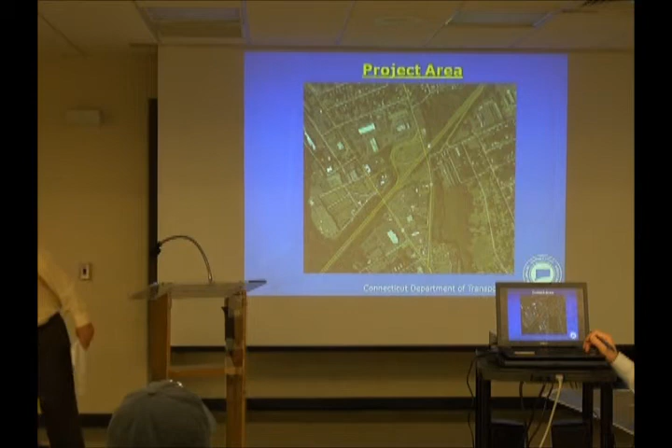Let me describe the area. This is an aerial view, a Google view of the project area. Route 63, Route 69 -- I know it's not as clear, it looked much better when it was not as large. There's Lucy Street, the Parkway, and the southbound and northbound directions.

This is Pondley Avenue. So this is basically the project area. In the south we will be doing some minor improvements down at the intersection of 63 and 69. I'm sorry, I know you can't see through me, so I'll move to the side, but I still want you to hear me -- if you can't, just let me know and I'll speak louder. So the southerly limit of the project is at the intersection of 63 and 69, and the northerly end of the project will be at Lucy Street.

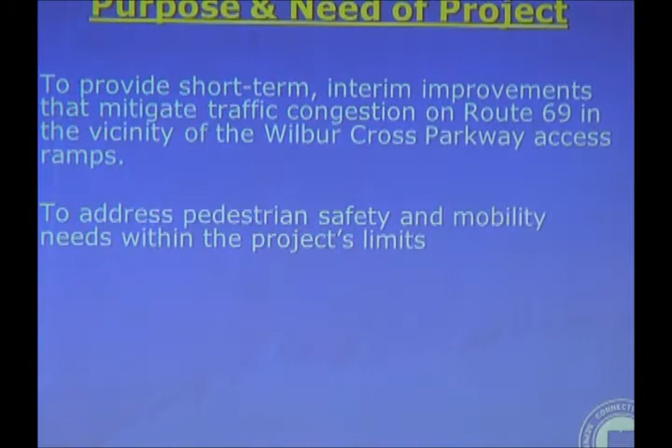The purpose of our project is basically to provide short-term capacity improvements, and also to provide pedestrian improvements both in safety, accessibility, and mobility.

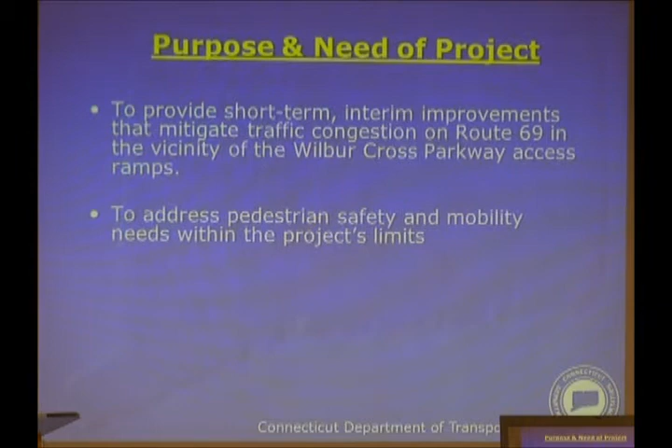So, as Peter mentioned, we're in the project development unit, and what we do is develop projects. We try to gain consensus through various stakeholder meetings like tonight, and eventually we will initiate that project.

The other milestones in the design process: our design would start once we initiate a project. It's going to go down to our state design unit, and they'll be doing the design. As Peter mentioned, once you get to the preliminary design phase, that phase identifies where the impacts are, where the new curb lines will be, what the impacts of that new curb line are, and it gives the public more to look at as far as really what the design looks like.

What we're showing you tonight is a conceptual design. It meets our standards, and these are basically the framework of what the design will look like. This green arrow shows us basically where we are in that process.

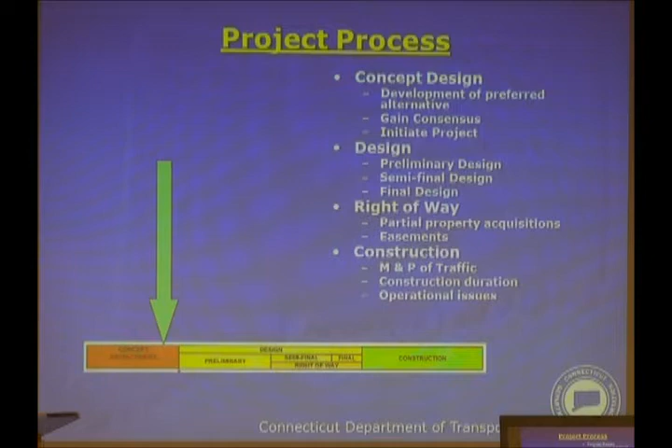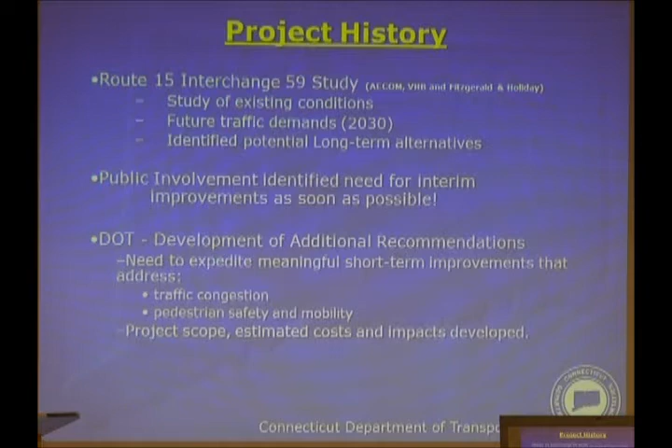This project has a history. It's been an ongoing study, I believe four years or so in duration. This area has been studied, and there's been some long-term alternatives that have been discussed and developed. There was a public informational meeting held in May of this year, where the results were made public. One of the reactions to that public outreach was the fact that there wasn't a lot of short-term improvements included.

So we basically made an effort to look at this again, to identify any short-term improvements that were potentially there, and we were successful in doing it. Again, we're trying to ease traffic congestion. We know the need for longer-term, more meaningful projects is warranted here.

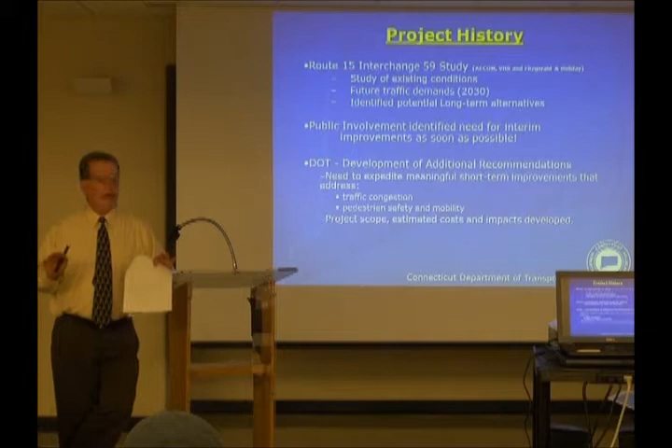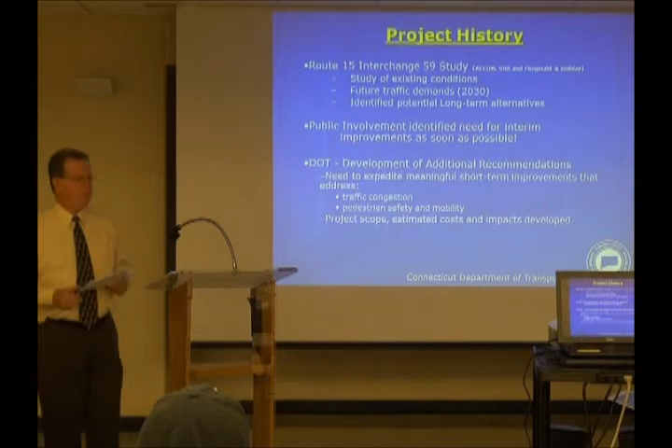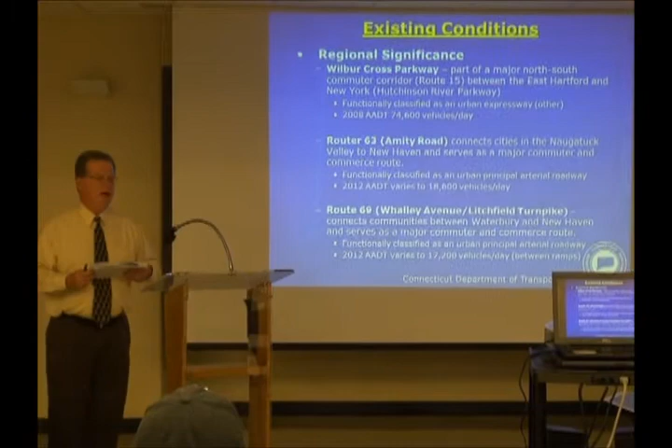There are safety concerns that the department's very concerned about. There's congestion concerns from a larger perspective that we're looking at, and there are other initiatives in the area. There's also a study of Heroes Tunnel going on, which I'm sure you've been made aware of -- that was covered in the May meeting. Just to go over some of these, there's a major convergence of roadways at the Wilbur Cross Parkway, a very busy roadway.

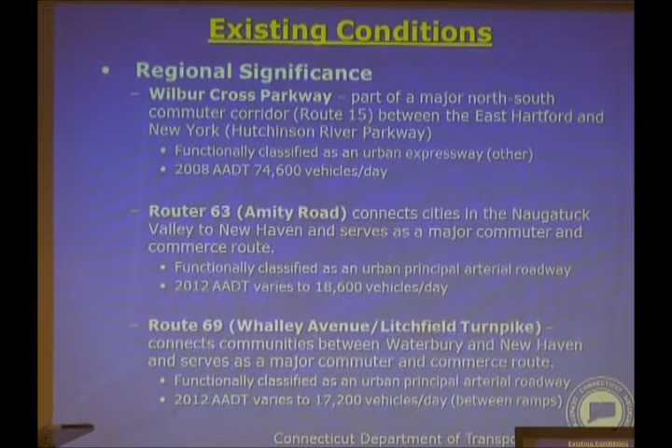It's a north-south route, but it really goes east-west also. It's a major connection from New York to New Haven and beyond. Route 63 basically connects, although it goes way up in the corner of Connecticut, it really serves the cities in the Naugatuck Valley, providing a direct connection into New Haven and also access to the Parkway. Route 69 terminates in Burlington, but it serves the Waterbury to New Haven corridor, and also access to the Parkway. So, very busy roadways.

Between Route 63 and 69, there's actually more volume on Route 63 because it connects those nearby cities of the Naugatuck Valley to New Haven, whereas on 69 you're going through Bethany and Prospect into Waterbury. It's just a little different corridor.

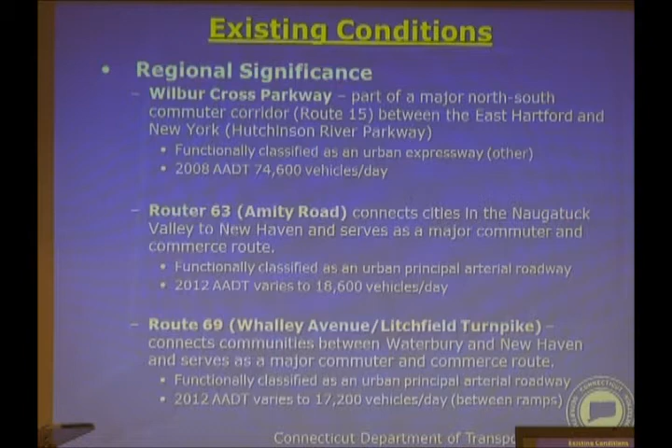But there are some other roadways in the area. You have Lucy Street, a state roadway connecting Route 63 and Route 69. It's a very busy roadway, partly because of the access points to the Wilbur Cross Parkway, basically used as a connection to get over to those access points. Pond Lily Avenue is a municipally owned roadway, but it serves as part of the entrance ramp for northbound Route 15.

We have some speed data here. Basically, both corridors have a speed limit of 35, and the average speed isn't much higher than that. This is information that we tend to need as engineers, so a lot of times we plug them in - not so much that the public's interested, though it could be.

As I mentioned, the connections to the Wilbur Cross Parkway - 3 of the 4 movements are accessed exclusively off Route 69. There's a lot of traffic being transferred from Route 63 onto 69 to access those ramps. The only shared access point is the southbound entrance ramp, which is also access to Route 63.

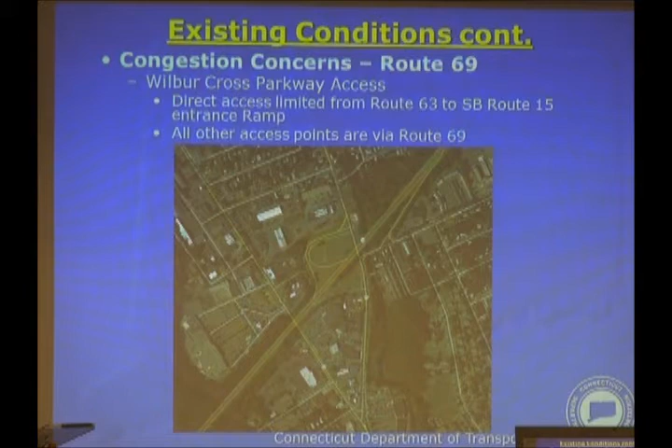It takes approximately 25% of that signal time, which equates to just about 30 seconds. Overall, it's 25%. The cycle length is 115 seconds. Now, I know that could be mumbo jumbo for some people who aren't into that, but the bottom line is that phase is causing some additional delays.

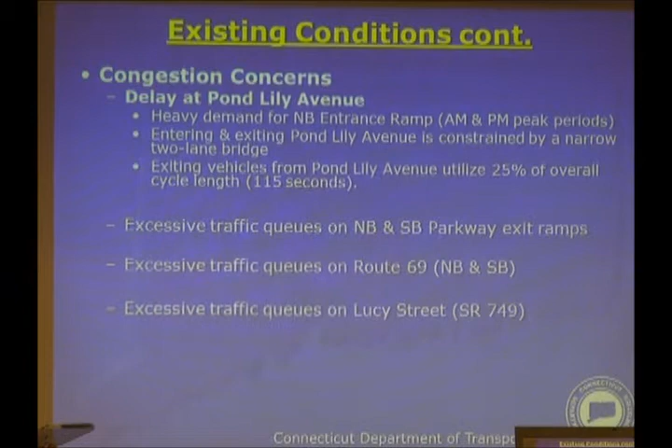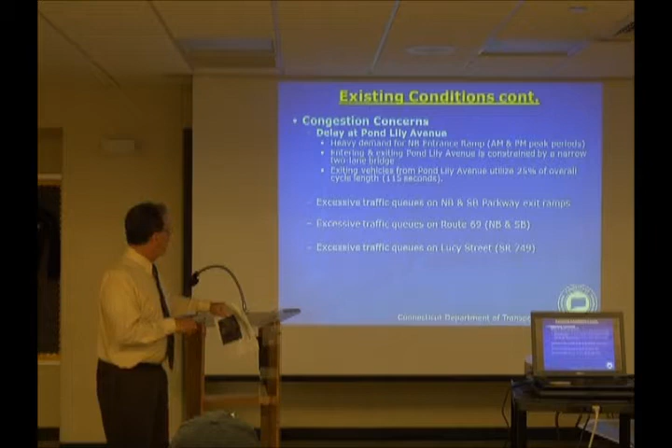Actually, we have such heavy demand for southbound left turns and northbound right turns that the excess time needed is very significant. So because of that compressed time period, out of 115 seconds, it leaves about 85 seconds for the other movements. And because the demand is so great, that's not sufficient, and you start getting congestion and backups because of that.

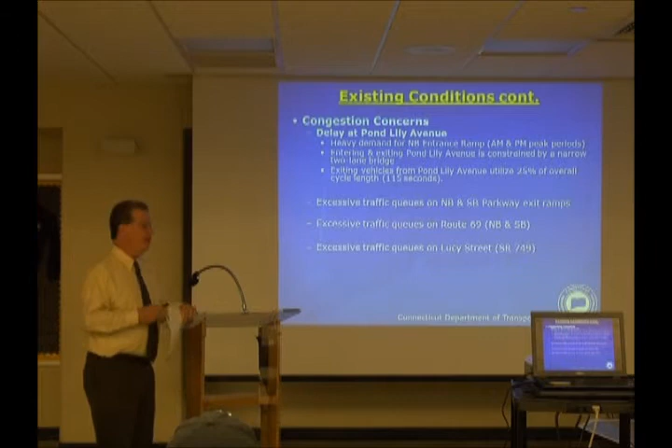In the southbound direction, as those who drive it will attest, it will back up to Lucy Street. Many people think there's a problem with Lucy Street. Although it could be made better if it was wider, the key or underlying problem is here at Pond Lily Avenue.

Along with queues, we also have some things not necessarily related to this - the parkway exit ramps. The northbound is not signalized. They have to vie for gaps in existing traffic. So that's a congestion point.

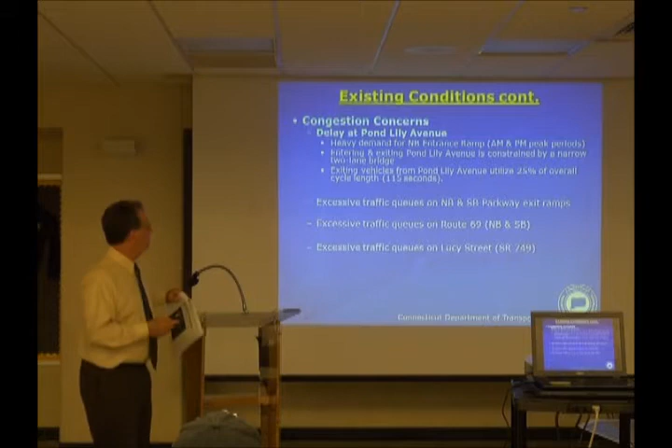And also, southbound exiting vehicles have a heavy demand for left turns exiting the ramp. There's only one lane that accommodates it, and that's really not sufficient. So we have congestion in this area, and that's why we're here tonight, to try to address that.

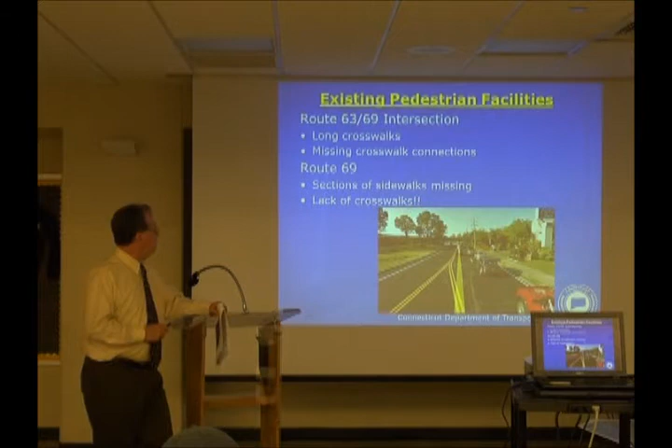So, the other thing, just to complete an existing condition overview, is the pedestrian facilities out here. At the intersection of Route 63 and 69, there are several crosswalks. They're very, very long, and it's missing one of the major connections because of the openness of Whalley Avenue going north, where it's wide open at the split for 63 and 69. There's no pedestrian crossing there.

As you continue north on Route 69, the next crosswalk is at Lucy Street. There are no crosswalks on Route 69. The sidewalks on the east side of the road extend for maybe a third of the way and then disappear. You have basically a worn path, with some short sections as you approach Pond Lily Avenue and in front of some businesses on the east side of Route 69, where the city has some motels. This shows a depiction of that worn path, as I was mentioning.

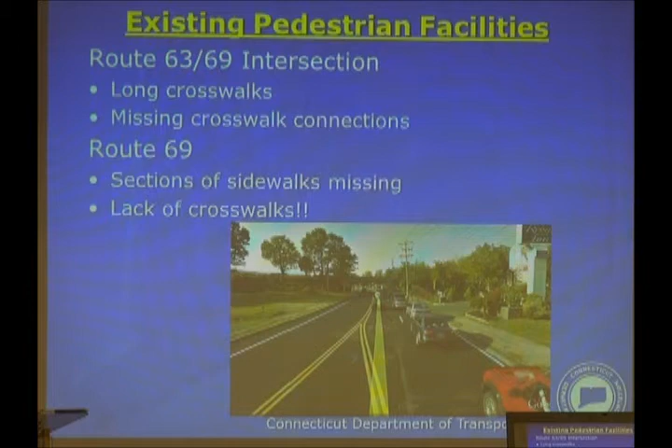It's very difficult for pedestrians to cross the street. Once you're on one side, you're basically locked in because there are no crosswalks. It's a very busy road. So we want to acknowledge the fact that pedestrian facilities out here are really insufficient.

So at this point we're going to go forward and describe some of the improvements we're looking at. Starting from the most southerly point, the intersection of Route 63 and 69, we made some modest improvements. It's a very busy intersection, as everyone is aware, and a major diverge point for northbound traffic going onto either Route 63 or Route 69.

This image has a darkened area here, just to make the proposed improvements a little more visible. Underneath that darkened section, you can see the existing crosswalk. It's in a location where it's extremely long. By moving the stop bars back, it allows us to shorten those crossing distances significantly.

We also added at this split a raised island splitting Route 63 and Route 69, and added a crosswalk in this area as a safe harbor for pedestrians. The other modification we're proposing is a bump out at this side street. It's a one-way roadway with parking on the right, so the bump out on the right side protects that parking.

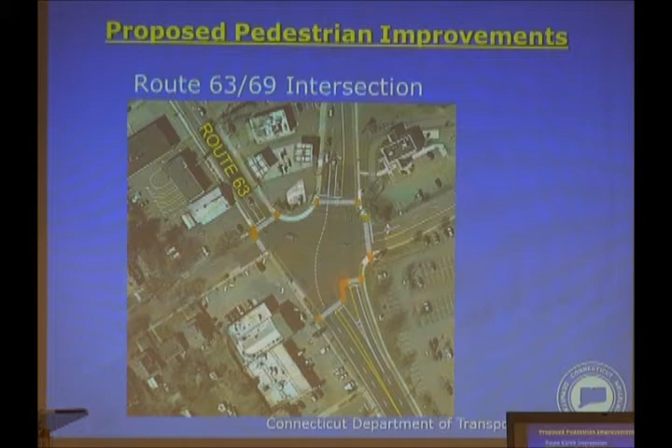The next location we're going to discuss - I've blown up particular areas so we can discuss them. After we complete the PowerPoint, we're going to put up the image as a PDF showing the whole project plan, and if anyone has questions about any area, we can zoom right in and talk about it. But for this presentation, I've just identified certain key spots where we're making modifications.

At this location, this is the northbound exit ramp onto Route 69. Today it's unsignalized, with a one-lane approach - you can see the shoulder stripes here. What we'd be doing is widening, not a lot, but enough to provide a two-lane approach. This allows us to manage traffic better, with lefts in one lane and rights in the other. Since this will be signalized, it also gives us the opportunity to provide a crosswalk.

This is the section of sidewalk on the east side of Route 69 that's missing. There'll be new sidewalks from just north of the intersection with Route 63 and 69 up through this area, on the east side of the roadway. There's also a short section in front of the gas station at that corner that would be extended.

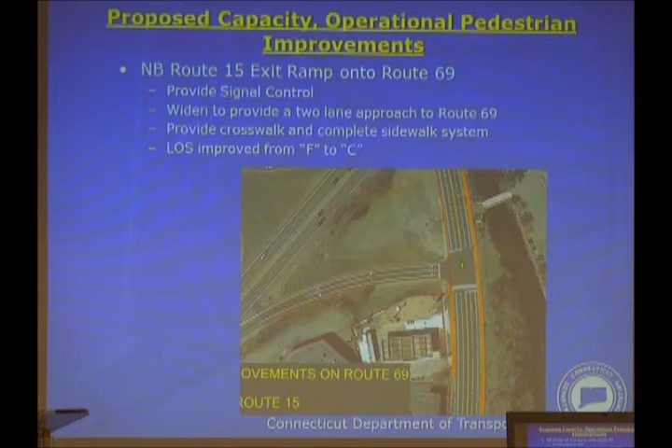This is the next location, north from Route 63 and Route 69. This is the intersection that had our focus - this bidirectional roadway has some characteristics that cause concerns or congestion.

That roadway goes over a brook. It's a two-lane, rather narrow bridge, so it doesn't allow for a two-lane approach into the intersection from the west, nor can we make a double left turn, because there are only two lanes on that bridge, one in each direction.

When we looked at the volumes, one of the things we do as designers is go out and get turning counts at each location, so we know how many vehicles are making maneuvers at any particular spot in the network. At this particular location, I think it has something to do with congestion at the Route 63 and 69 intersections - people on Pond Lily Avenue find other ways to go south. As a consequence, we have very few lefts being made at this location.

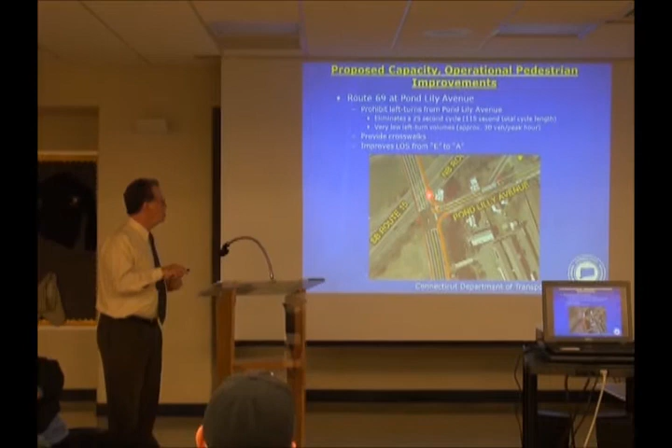There is a heavy right turn, and that heavy right turn would still be able to be made - it would be an exclusive right. We would put up a raised island configured in such a way that would prohibit lefts out. Now what this allows us to do is...

We're going to change the phasing at this signal. So as these lefts are being made, these right outs are being made - call it an overlap. Basically, there is no time being attributed for exiting vehicles, which allows us to use that extra time on Route 69, both south and northbound. So we're getting significant congestion relief, an improvement in traffic operations, by eliminating that phase.

The other thing we're doing here is providing crosswalks. Again, this is exclusive on the east side of the roadway, not on the west side. The west side is very tight, and that's the area of the ramps. We really don't want people crossing an expressway ramp if we can avoid that, so we have pedestrians on the east side of the road.

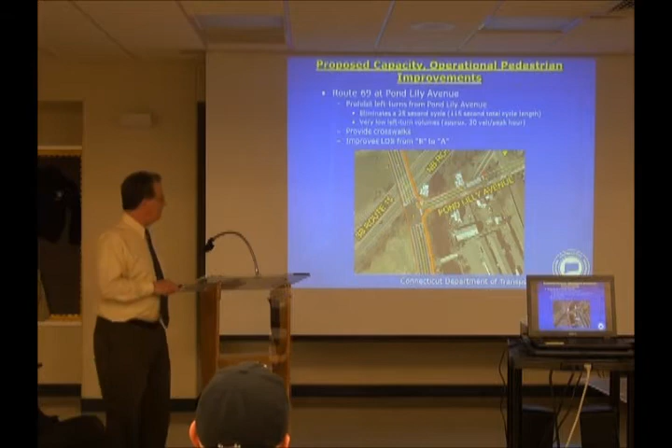In conjunction with that, one of the other things that came to our attention was: today, westbound vehicles on Pond Lily Avenue have the right of way over eastbound vehicles heading for the expressway. What we've done is propose a stop sign for those westbound vehicles, and also a 'do not block the box' restriction at that location, so that area always stays free.

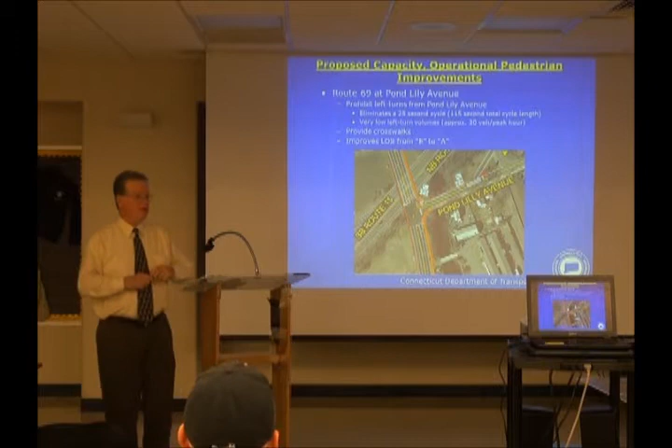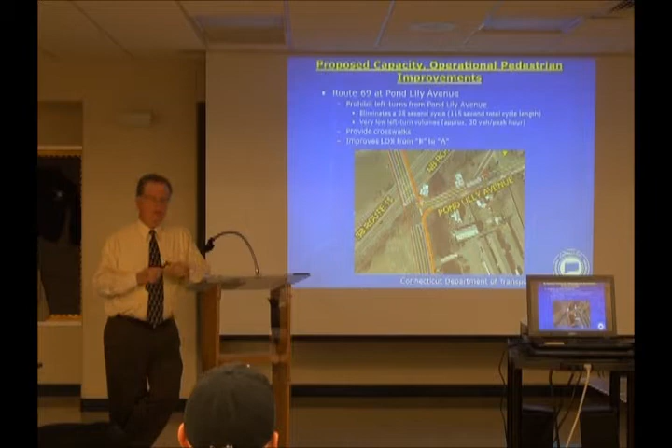Now, the other thing we're doing here, which isn't really part of this image but you'll be able to see when we put up the large-scale plan, is at the intersection of Valley Street. Today it's a two-way stop sign - going up the hill is uncontrolled. We're proposing to make it an all-way stop at that location.

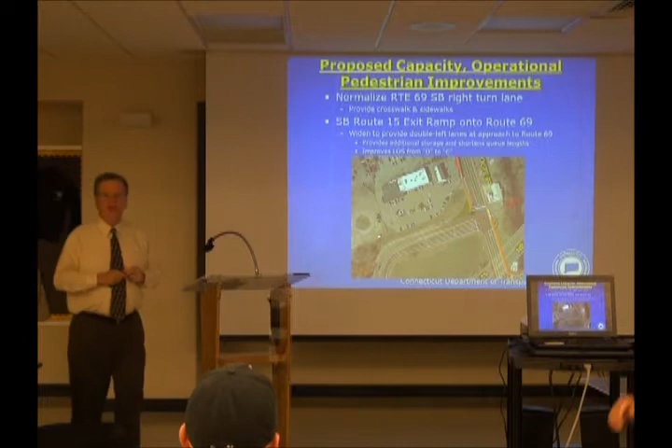Okay, continuing north - this is the southbound exit ramp. What we're proposing here for changes in travel lane use is starting a two-lane split for that exit ramp, just as you come out of the horizontal curve, for exclusive left and exclusive right operations. As you continue, it would be widened to allow for a double left.

So the idea is that if we have two lanes, we get people closer to the signal, it'll take less time to process those left-turning vehicles through the signal, and we're going to have more time for operations on Route 69.

The other thing we're doing, again, is continuing that sidewalk on the easterly side of the road. This is a little bit different for those familiar with the area. Today there is a right turning roadway - it's outside of the signal, and there is a yield at the end of that ramp, that little turning roadway. So you yield to left turning vehicles entering onto the ramp.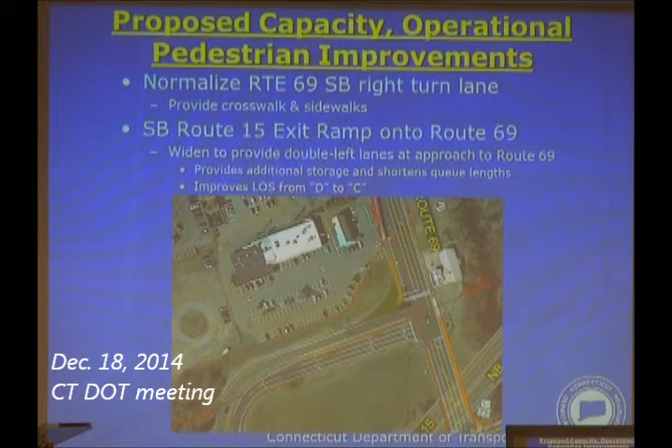Actually, looking at the volumes, they really didn't warrant an exclusive lane, because access from Route 63 is present - that's the one movement we can access through 63. The right turning volumes really weren't terrible; they're really exclusively from Route 69. So unlike all the other movements where you combine the volumes for both Route 63 and Route 69, this is the one movement that's actually rather light comparatively.

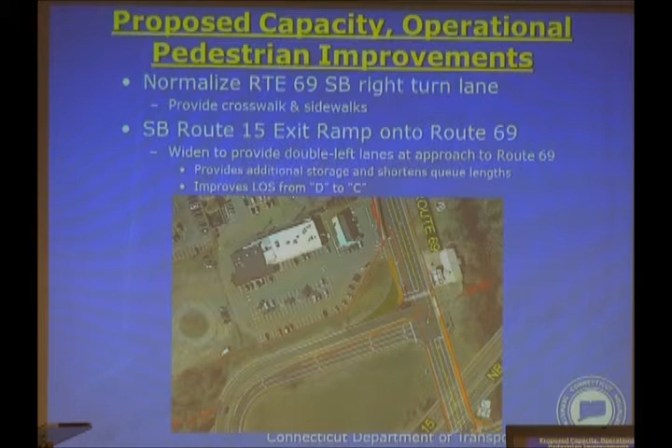So what we're doing, again for pedestrian safety and pedestrian access - this was brought to our attention and we incorporated it - is a crosswalk here. There is no crosswalk there today, so we're proposing a crosswalk and bringing that right turn lane into the signal. Likely that would be right turn on red - it'd be allowed. Seeing that we're still preliminary, I'll just say likely it will be done that way.

But that kind of encapsulates what's going on at this location. Again, double lefts, and also bringing that right turn lane into the intersection and providing pedestrian access. There would be a new sidewalk that would connect to the existing sidewalk, which is just north of the driveway.

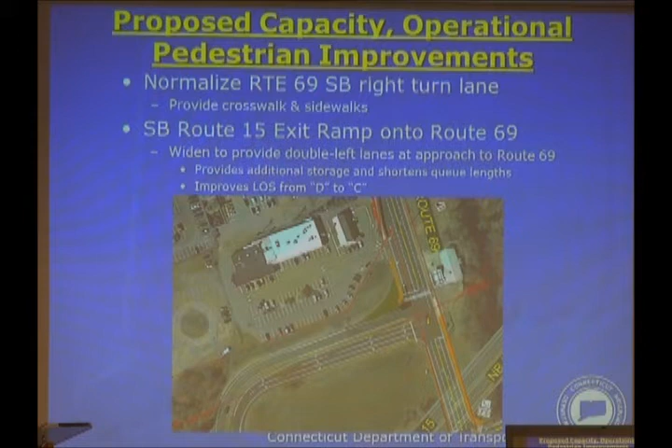And lastly, as far as our improvements, short-term improvements go, we're extending that sidewalk up to Lucy Street. We're also providing a widening. This darkened area shows a widening, or it's supposed to show a widening. Just looks like a black spot. But anyway, it does allow for an additional through lane up to that point.

Now, again, we talked about these improvements being short-term. If we had extended that lane further north, we would have some major property impacts. That's not something we wanted, to avoid that, because of the nature of these improvements, trying to get them out as quick as we can. So our widening in this area is limited to just south of Merritt Avenue. So again, that additional widening will allow for additional storage and will overall help the network.

Now, as I'm looking at this, I realize I never did mention what these improvements do to capacity. Typically we talk about capacity as level of service. Level of service is a measurement of delay. And based on delay, they'll assign a certain value, A through F. A being very good, and F means that you're there far too long, roughly.

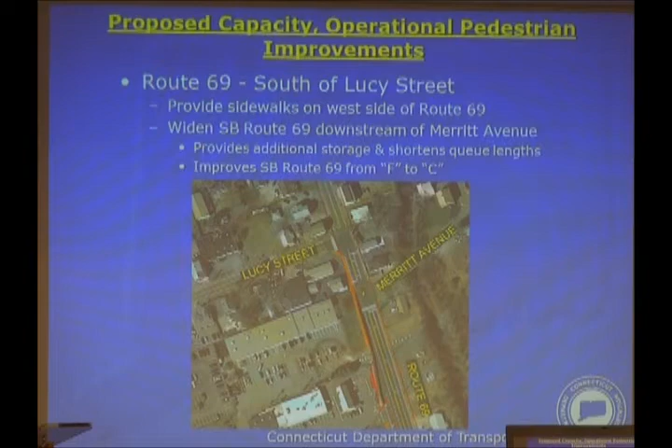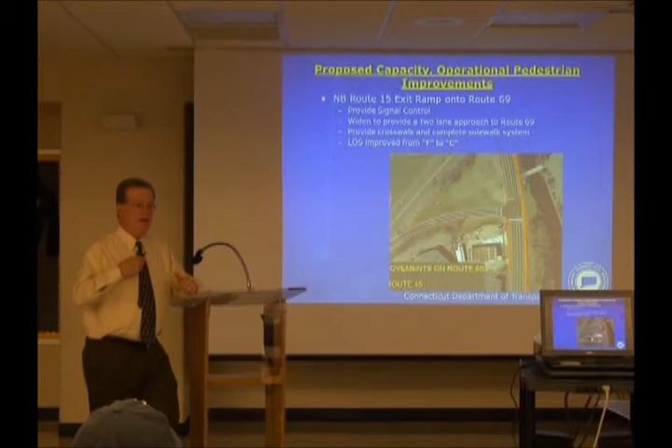And basically from our, could you go back a couple? Sure. From, yeah, we'll start at the northbound off-ramp. Basically, this ramp queues up because there's no gaps. Because of the delay on this ramp, the overall intersection capacity is an F. So the delays are that you are waiting an inordinate amount of time on that ramp waiting to exit.

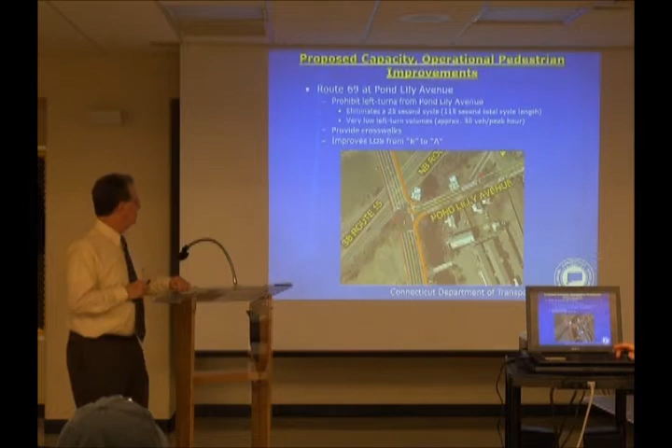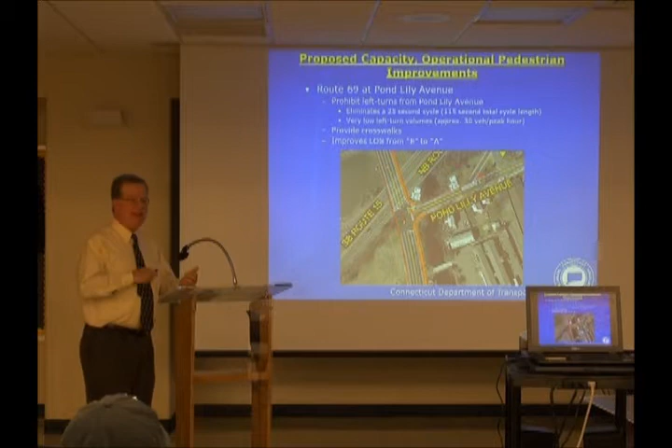As we go further north and we look at capacity, yes, this is actually a level of service B today. By eliminating that phase, very few people are stopping. The left turns have to yield to the right, to the through movements, but that's a two-phase signal. It's very, very efficient. We're getting an excellent level of service out of here. That's a significant capacity improvement.

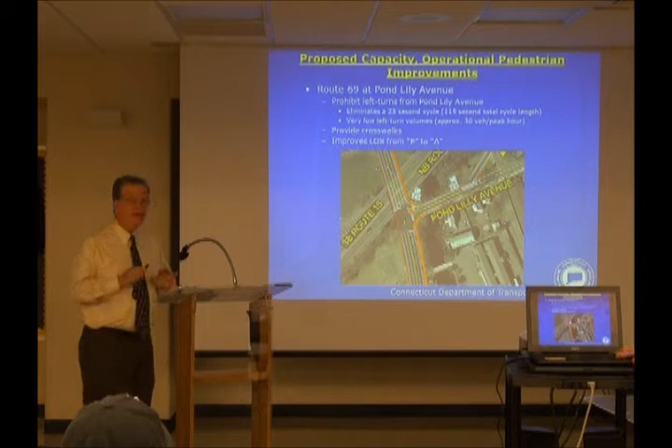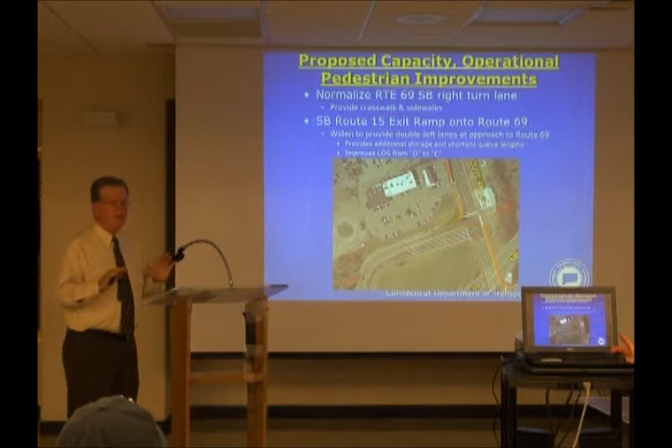At the off-ramp, we've gone from... it's still a C, which is acceptable. It's like a 40-second delay or something like that, that range. Much improved from what it is today.

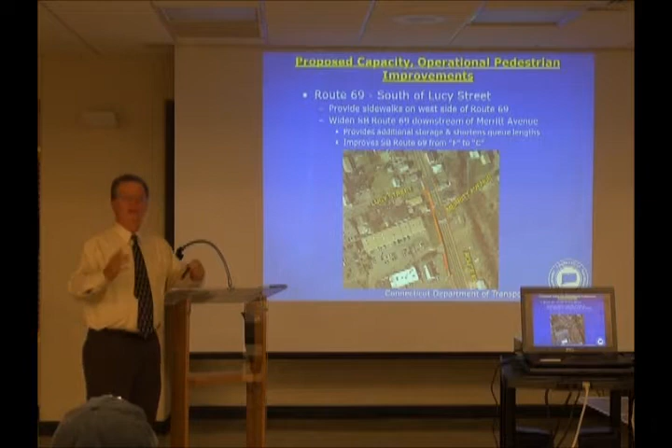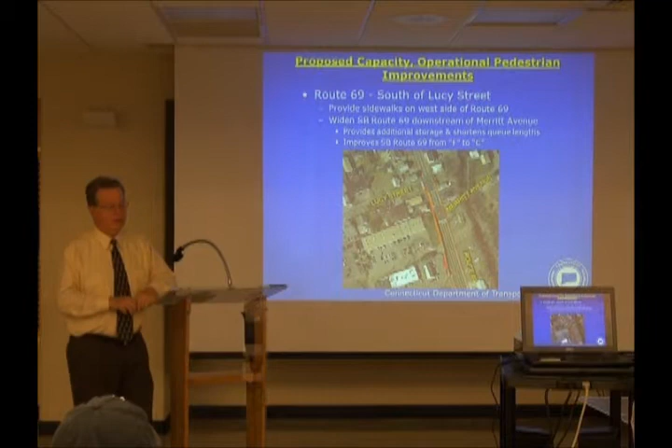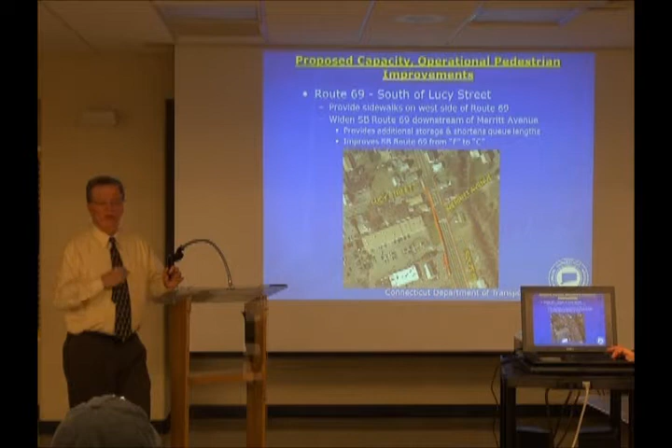And as you go further north, up at Merritt and Lucy, Lucy Street is still going to queue up. Again, access points, we didn't change any of the access points. Vehicles from Route 63, 3 of those 4 access points are going to have to travel down Lucy Street to get on Route 69 to access the Parkway. So there'll still be queues there, but the through movement will be much less delay, and overall, even though it's still considered an F today, it's... well what did it say, C? Well, the overall intersection improvement may be a C, but I know that people sitting in queues on Lucy Street may not be real happy because they're still going to be sitting there in queues, but it won't be for as long. And the overall operations of the intersection will still improve.

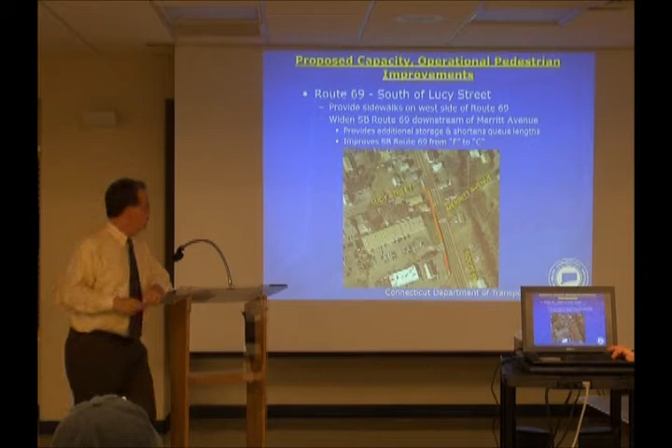So again, I think the nature of what we're doing, you could say we didn't make a lot of changes here. We haven't added a lot of new pavement, but we are getting some significant capacity improvements.

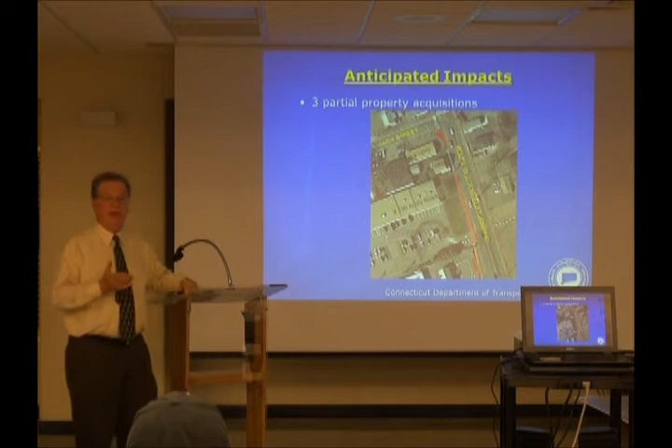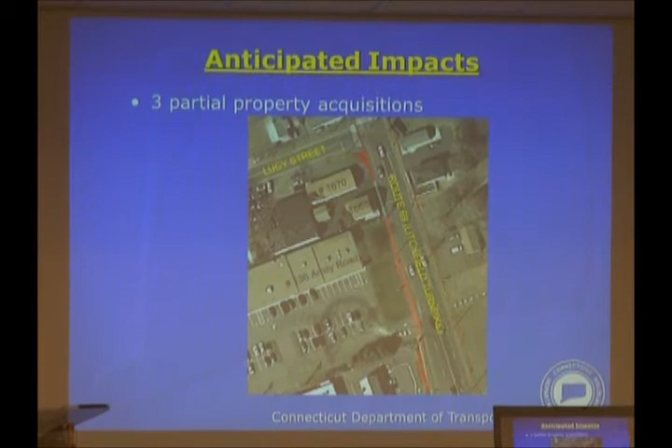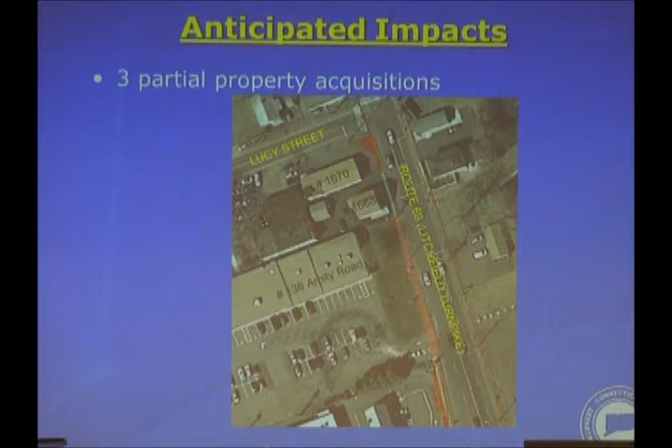All right, so of course there are some widenings going on, and because of that, there will likely be some partial property acquisitions. There are 2 slight acquisitions at the corner of Lucy Street and Route 69, and also in the plaza, the more northerly plaza, 36 Amity. I guess that plot goes actually all the way out to Route 63, but there would be a slight encumbrance on their property, and that's for that widening, for that additional through lane. But that would be it as far as impacts.

Environmental permits: a potential floodplain management permit, that's something we'll be looking at as a possibility. Construction costs just over $4 million. We expect construction to start at the beginning of the construction season of 2018. We would expect that the construction duration would be one season.

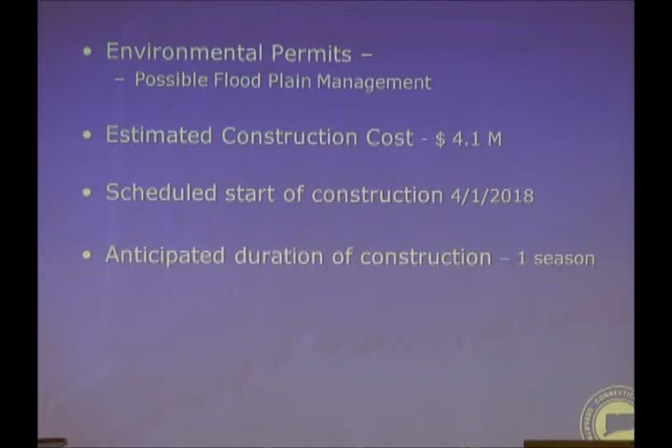Now, I had mentioned, we understand that these improvements do not address some of the greater needs that are out here. There are some safety concerns that we want to be addressing, and we want to be able to modify our access to make it more efficient, our access point on and off the Parkway. So we still have long-term improvements that we're looking at here.

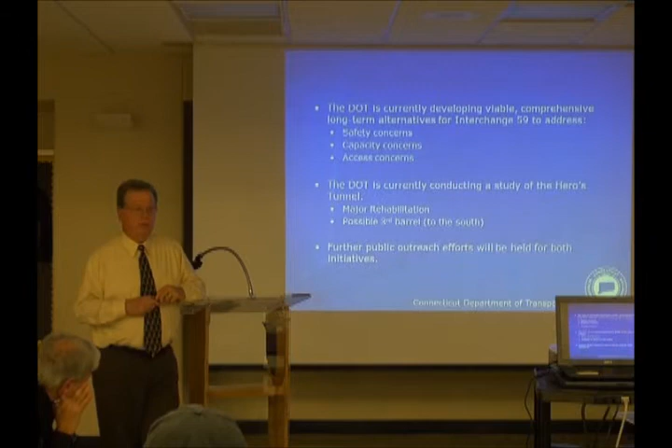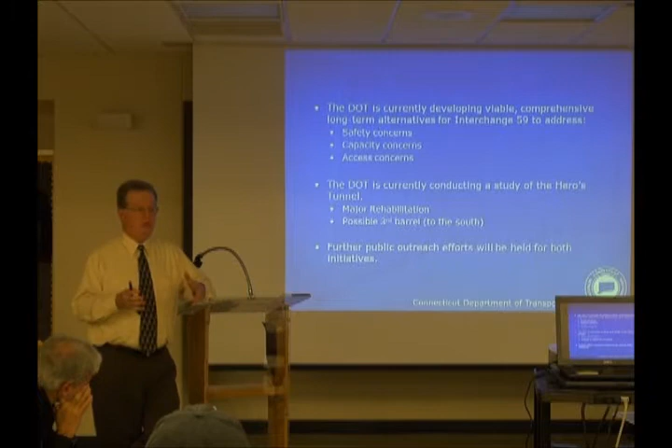In addition, we're looking, as I mentioned, at the Hero's Tunnel. There's a study that's being conducted currently. And what we come up with for the tunnel will be coordinated and compatible with our long-term improvements for interchange 59. Again, both efforts will have their public outreach comments and outreach efforts going on.

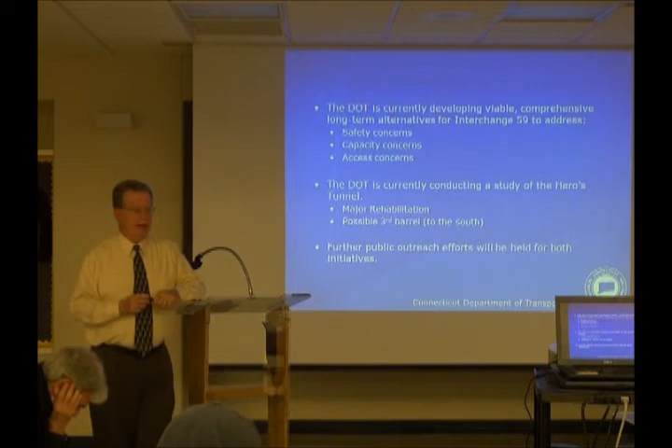Sorry I was so long-winded. I was hoping to do it more shortly, but all right. So,

Yes, sir. First question, is there anything to be done about the northbound 69 left turn into where Starbucks is? Because even having two left turn lanes is terrific—one of them is going to be coffee drinkers, and you're back down to one lane again. Anything to be done about that?

Unfortunately, under the short-term improvements, but we do recognize that location is problematic. Yeah, and we do too. And that's something that we are looking to address in our long-term improvements.

How do you address that in your long-term improvements? I mean, I'm sure you have some ideas. Yeah, we do. We're looking at perhaps changing its access point. One of the things that did come out of the previous study was talk about a...

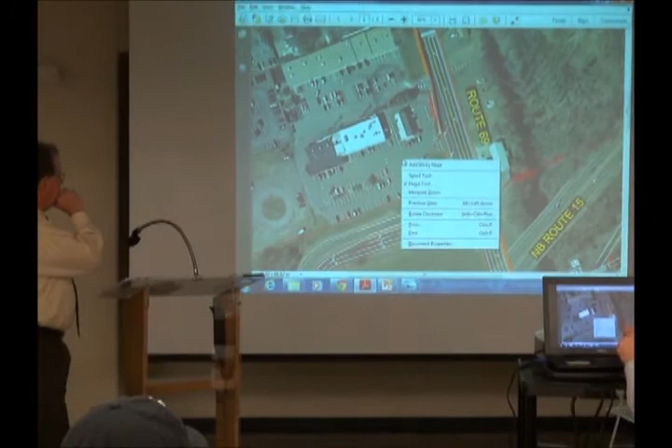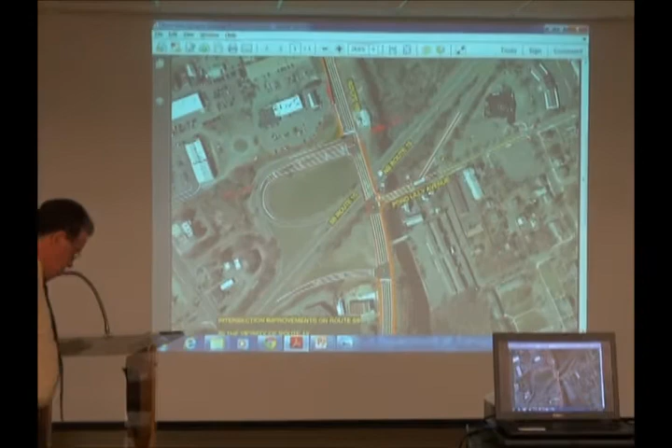Could you put up the big PDF? Yeah, oh, I'm sorry, zoom out if you would. The geometric configurations of the southbound ramps... yeah... allows for this.

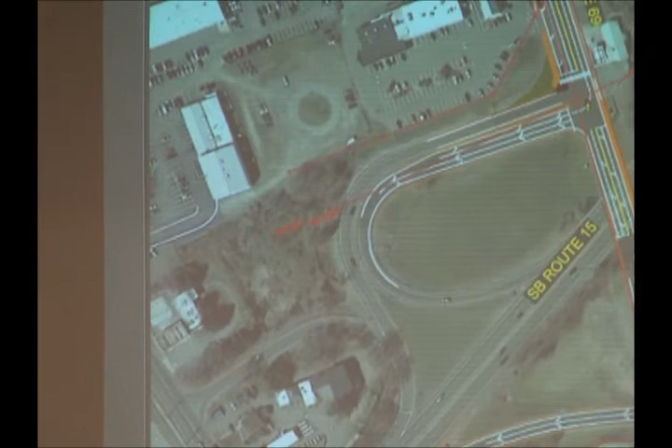One of the things that was identified in the long-term study that was going on was a new connection to connect this—a possible direct connection with access to the ramps for the parkway. There is potentially, and we have to explore, right? One thought would be maybe to have this access be limited to right in, right out, maybe put a median down the middle, and provide access maybe to that connection roadway. That might be something that would work, might not. We have to check that out.

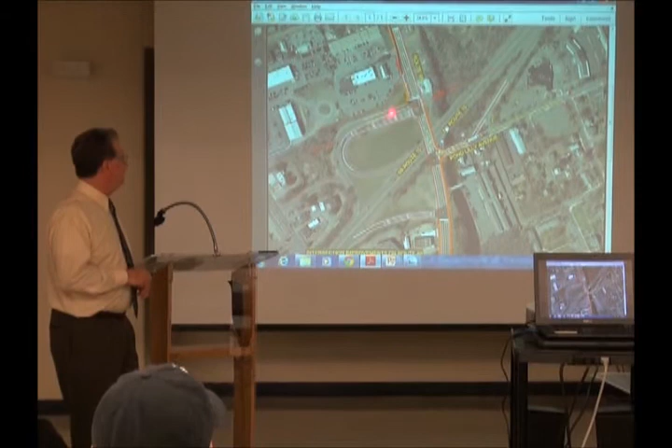Honestly, we have so much volume coming off the expressway or the parkway. We want to make sure that adding an additional phase isn't going to create undue congestion. We're very concerned about the volume and the safety of those vehicles coming off the parkway. So that's one. We're also looking at whether it's possible to put a roundabout up here and have direct access to a roundabout. That's something we're looking at. So we certainly are looking at various alternatives to try to improve access there.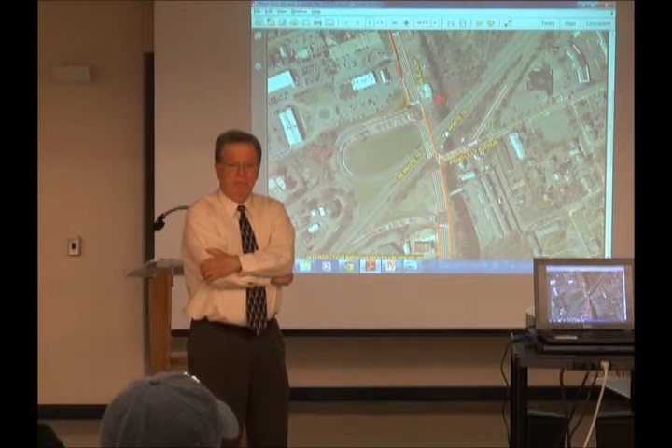What's your timeline for having proposals based on the various alternatives you're looking at? Well, that's a good question. Our timeline is that it's actively on my desk—my boss has asked me the same thing. So it's something we're actively working on. I cannot give you a definitive time, but a wishful, optimistic but not overly optimistic time. I like your thinking, you know, I'm an optimistic guy.

As Tom said, it's being coordinated with the tunnel study, which isn't completed yet. That's expected to be completed sometime around the middle of next year. So we don't really have a firm timeline to finalize concepts. Tom is kind of at the stage where he's got some ideas, and we're going to vet them with others in the department. But it's really tough to give a firm timeline as to when we'll have solutions.

Obviously, public involvement is going to be part of that effort when we do have something to present. Right, but we don't yet—we're still in the very early stages. We have to get something that's workable, and then one that we can gain consensus with. So all that's going to take a little time. We're still working on the first part.

So what we really are here tonight to talk about is the interim improvements. Yeah, but we recognize the importance of doing the long-term improvements, and that's something we want to emphasize, okay?

Just one question on the long term. The presentation that was made in May covered short term, mid-term, long term. Where does that whole thing stand? Was that all out the window now and you're starting from scratch, or does this meld into the overall plan? No, certainly not—there was a lot of good information that was garnered from that study.

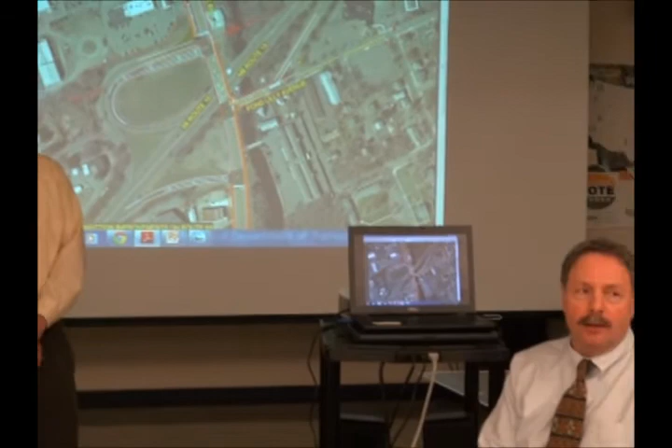Local government said it's DOT's responsibility. I see, we could certainly look into that—I don't have that information. It's almost a year. Yes, it started exactly December 30th last year. Last term it was said it would be finished in the fall, then it was said November 24th. Still not done. I'm not sure who's got the contract, whether it's a state contract or a local one. It could be under a local bridge program. I really have no idea, but we'll find out.

Currently we have a 'don't block the box' at Lucy and 69, and you said the lights are similar on 69 at Lucy and Merritt. Is there a way of expanding the 'don't block the box' in order to stagger traffic more?

Potentially, yeah, I guess we could look into that. There's a don't-block-the-box sign at the end of Lucy Street onto Route 69. We got that passed okay, like last year or the year before. If that expanse goes that little bit further, it should bring traffic through the congested area a little easier. But I know there's not a lot of queue distance between those two intersections. They're very close. Through phasing, we can make sure no one's sitting there.

I'm not sure what the phasing is. We could look at something like that, sure.

Thank you, sir. A couple things. Is the timeline related to funding or priority? And is there anything in terms of the studies, I know you've done them for many years, as to the impact that the existing growth will have waiting 2.5 years before it gets done?

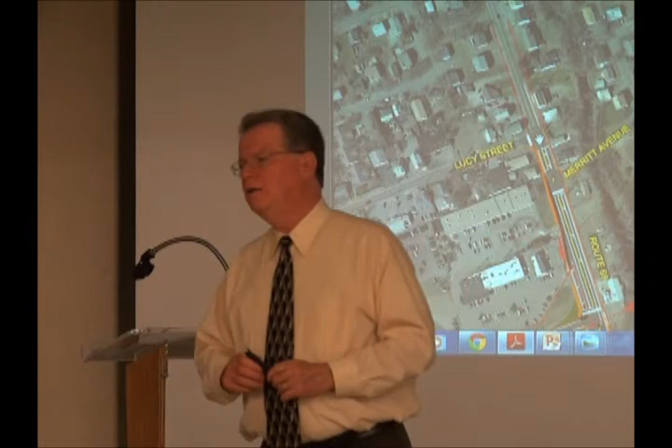We looked at that. It's quite a neighborhood, though, that you'd be inconveniencing. That was actually what we looked at first. Once we looked at it and saw that we could accomplish the same thing by still allowing rights out, that was the preferred choice.

Yes, sir. So I've been involved in this for the last 4 years as a member of the stakeholder task force representing the business community in Woodbridge. I really do applaud the efforts of DOT, the city of New Haven, and the first selectman's office from Woodbridge in pushing this, because this is the best plan I've seen to accomplish some major short-term actions, which I think is great. But I'm concerned that we've been studying this for 4 years and we're still 3 years out. I know it's already been asked, but is it realistic that we'll see this done in 4 years?

And what, if any, could be a potential holdup? If you're projecting that, is there something that could hold this up, maybe an issue that if we know about now, we could help address? You mentioned funding, for example. Has that been secured so we don't have to worry about that?

No, there's nothing like that on the horizon. So this is really pretty darn realistic. It's great to hear. And yes, it's really 3.5 years, right? We'll get there. We're going to try to compress it if we can, but it certainly looks like a spring start in 2018.

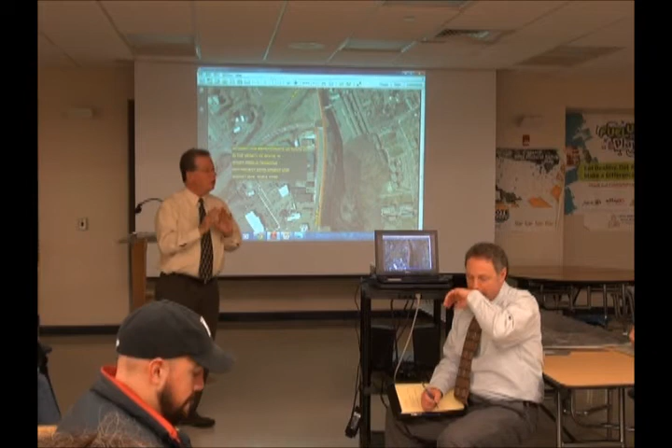Very concerned about safety. We're working on some long-term improvements that will geometrically change that configuration on both locations, the merge of those ramps, and also that non-existent acceleration lane onto the parkway. It was built for 30 miles an hour cars. But what we're doing with this project is some short-term interim improvements to address capacity on the ramps and on Route 69. So we acknowledge that's an area of concern and a priority for us to look at.

But under this project, where we're trying to achieve significant or some meaningful capacity improvements on Route 69, we are trying to expedite those so that they lessen the inconvenience for those traveling the roadway. So those improvements are coming.

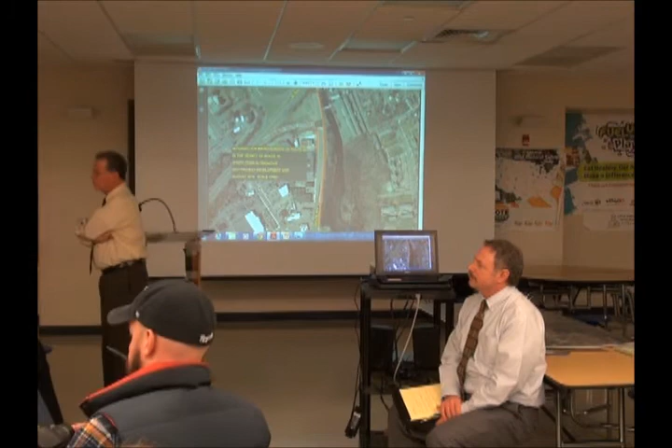Yes ma'am. Did you say that there's going to be a new traffic light at the northbound exit? Yes. And that's the only new traffic light? That's the only new traffic signal, yes.

So do you still have a 30-year timeline for the completion of the entire reconfiguration of the entrance and exits? There's no 30-year timeline. So what's the timeline for the rest of the improvements to upgrade the whole area? I can, rest assured, it's not going to be 30 years.

Really what we have to do, again, is we're conducting a study of Heroes Tunnel. Upon completion of that, we'll have some direction as to what that will look like. We're currently looking at the long-term improvements for access to the Merritt-Cross Parkway, and we'll be out at some point before too long. I don't want to say exactly when, because I'll be held to it, and if I don't meet that deadline, I'll be in hot water again. But we will be back out.

We will be talking about alternatives. Because part of what we're doing is gaining consensus, not only finding something that works, but also that we have buy-in. So we'll be out again, and we're going to be discussing them. I would say that those improvements will get off the ground within a year, two, maybe max, that we start some initiative there.

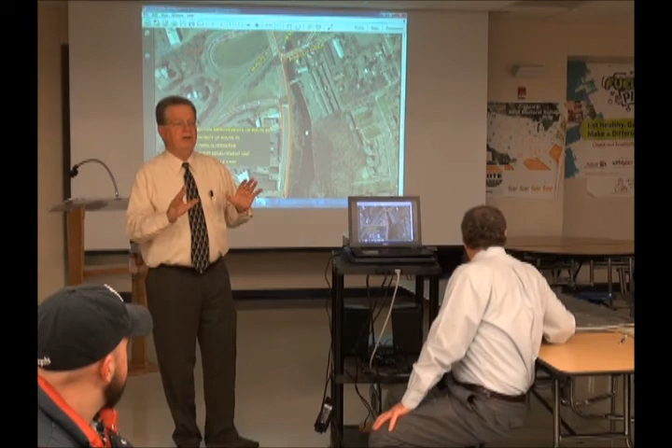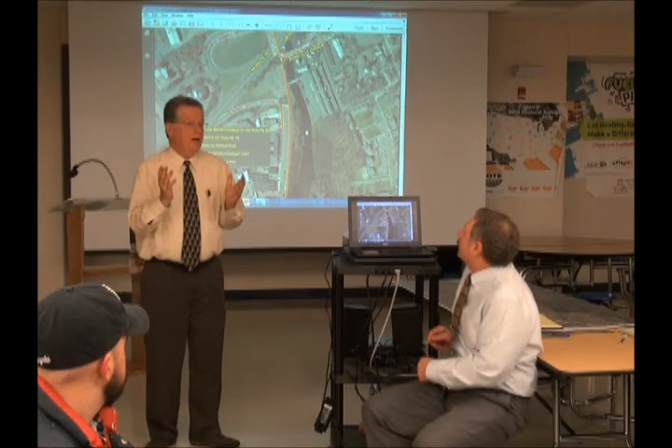Well, we could certainly look at that - honestly, we could look at that again. I think we just looked at that particular intersection as very, very busy, and again we were trying to just look for something without a lot of impacts. But we'll certainly look at the phasing of that signal and see whether or not there's something that can be done without a lot of time and effort. So certainly we'll look at that.

At exit 59 southbound, when you're waiting to turn to go north onto Route 69, the light turns red for the southbound traffic on 69, and then there's like a two, almost three minute delay before the light turns red for the northbound 69 traffic, and there are no cars going northbound at that point.

There's a lot of times a project where the signal is phased a certain way to make sure we've cleared out certain areas, so that particular section between the two intersections we want to have free. Now, with this project, we're going to be using updated signal equipment and the phasing will be modified. I can't speak to the particular nuance of that because each time of day is a little different in the timing, so I'm sure we'll have more effective use of time once we get this new project on the ground.

Are the long-term alternatives from the last meeting still on the table? What I'm referring to is coming out of Lucy Street, another lane to access southbound to the Merritt Parkway. Are those alternatives still there? And also a loop going north rather than crossing over onto Pond Lily Avenue. Are those alternatives still on the table for the long term, or not?

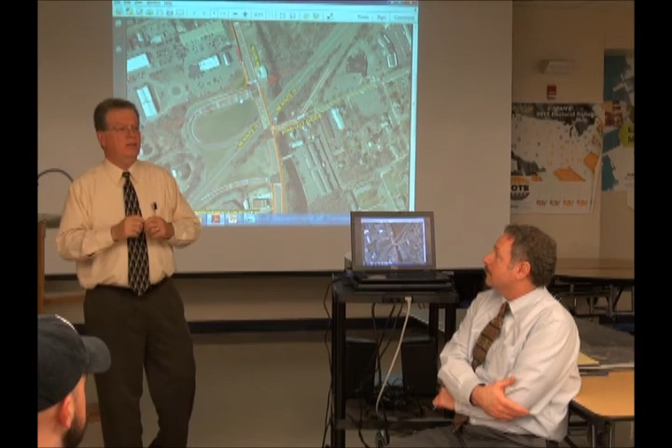There may not be the demand, depending on the alternatives we come up with, where traffic currently coming down Route 63, taking Lucy Street to Route 69 to access the Parkway, that demand might not be there because that access might be somewhere else. If this connecting roadway between here and here is built, the demand for traffic coming down Route 63 and trying to access this section of Route 69 is going to be greatly diminished because they'd have access off of Route 63. Why would you want to take Lucy Street to access something down here if you have access here?

So we're going to look at it with a large, big overview. We're going to take all considerations into account, but ultimately when we refine an alternative, we will have to make do or do whatever we have to do to make the network work.

So at this point, I can't look at that particular approach to that intersection and say it needs X, Y, and Z. I was just wondering what happened. Yeah, it seemed like a good idea. No, it is, if you're just looking at that location.

Any other questions?